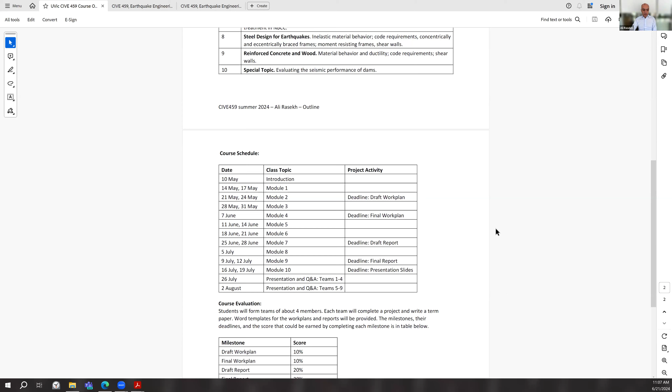As usual, we are at module number 6, and we are getting familiar with NBCC section 4.1.8. About good timing, like 21st, we are almost chasing our schedule.

Just a reminder that by end of next week, we'd like to receive the draft report where you should show about 60% progress, 60, 70, whatever, or more if you like. Then me and Behnam will review your work and provide comments to your work.

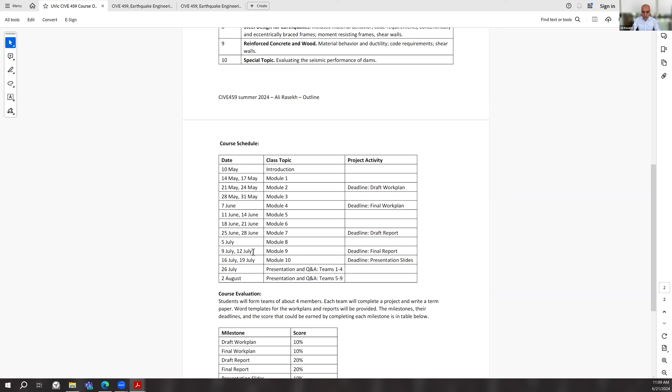Then you have 2 more weeks, or maybe you can continue your work, and in about 1 week, by about July 5th, after your reading break, you will receive some comments and then you'll have 1 more week to address those comments and finish. You'll be very happy because by about 12 July plus minus, you're 90%, 80% done with this course, or maybe 60%, 70% done, and then you can focus on your other tasks or projects or prepare for August vacation.

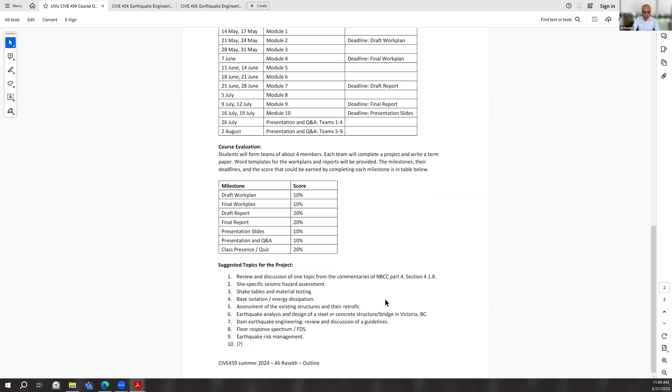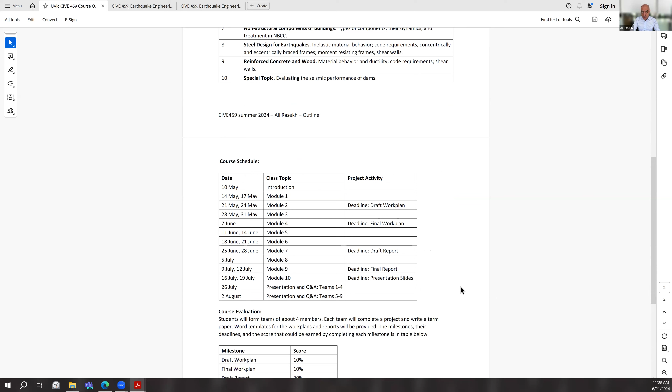So that's what we have. Generally, Behnam was very happy with the way you guys drafted your work plans, and I had a quick look - they look better than last year. I think you guys are progressing well so far. Just keep on doing what you are doing, and it would be great for all of us, finishing in time before August.

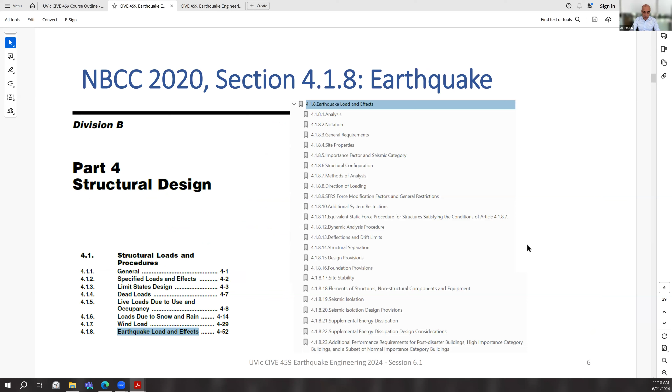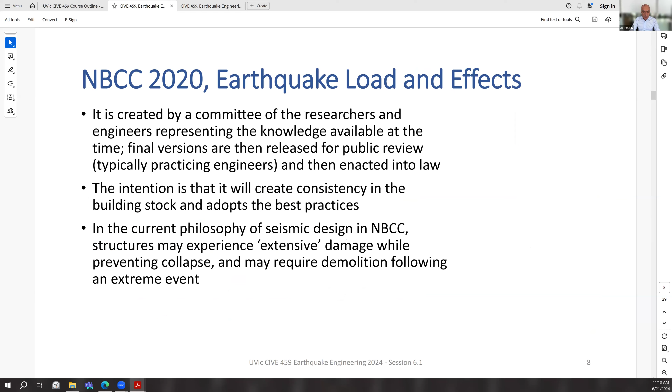Last week I was presenting NBCC 2020, and there's a link here, you can even Google search it, it's downloadable. It's a good decision made a few years ago that they make this free, available to everyone, because it's funded by taxpayers, so they shouldn't really charge for it. Development of the model code is probably some sort of taxpayer money, so it should be free. So you can download that.

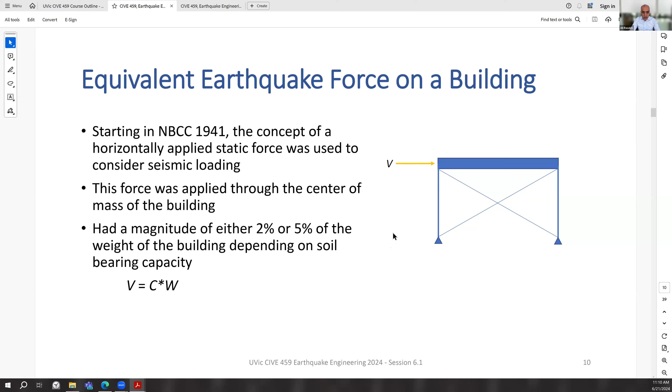We talked about the base shear, the concept of base shear, and why in structural engineering we call it base shear, because it's the total equivalent force that we apply to a structure to mimic earthquake response and earthquake forces and earthquake displacements. In a way it's easier, but sometimes it's better because it's easier to do and easier to verify and easier to validate and easier to gain confidence.

Sometimes easy procedures are more correct because a second person and a third person can quickly verify them and make sure that you are in the right direction. In the industry nowadays, like you guys, the younger guys, you like the more sophisticated computer modeling, but sometimes it's more difficult to gain confidence and make sure everything is correct and reasonable. These simpler solutions are easier to verify.

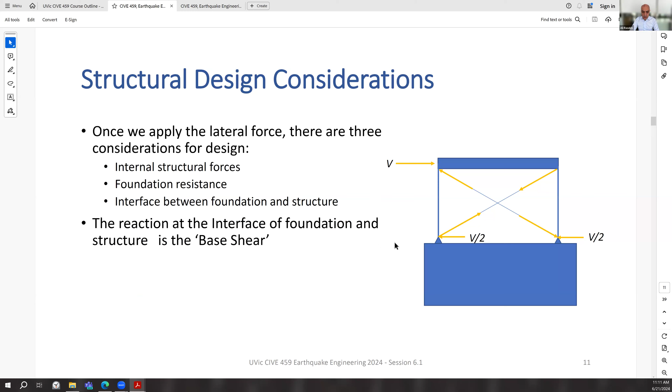So at least I generally recommend - I think we had a lesson about that as well, part of our discussion here - that at least we should go in multiple steps and start with the easier to understand and easier to verify solutions. Then if there is time and money, interest in client, then as a second step, go to more difficult solutions, which are more accurate in a way. There's a lot of interest in them nowadays, but at least do it step by step. Easiest solution based on this simple equation and code.

Then second step, I did RSA, and this is my model, and the results look different. Because of this reason and this reason, I have reduced the base shear by 10%, and I think that 10% is because I'm using a better solution. The reader has confidence, okay, there's a very easy to verify solution. Now the solution has improved by 10%, and these are the reasons for that.

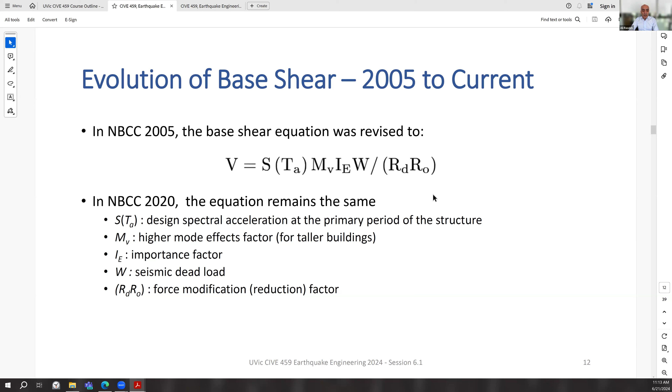Then there's more budget. Okay, I did a time history analysis, detailed time history analysis. I reduced the base shear by another 5%. And then the reader again says, yeah, makes sense because RSA is normally conservative. This company, this consulting, my colleague in the company has done a good job going to the next level of sophistication, and he has saved the contractor or the owner some money by reducing the base shear, which is very nice. So these are very valuable solutions, and they are based on lots of research and experience and experiment by engineers.

So you know that spectral acceleration multiplied by mass is the force that you expect to see. However, you are doing a single mode calculation versus higher mode calculation, and therefore you need an adjustment for that.

There is an importance factor because the more important structures will be less tolerant - say, if you want to think extreme, we are less tolerant towards cracks in a nuclear power plant versus a building. The building won't collapse because of a crack, but in a nuclear power plant, a crack may cause a lot of hazard to the people around it. Therefore, there are importance factors, just to build these ideas into your engineering judgment.

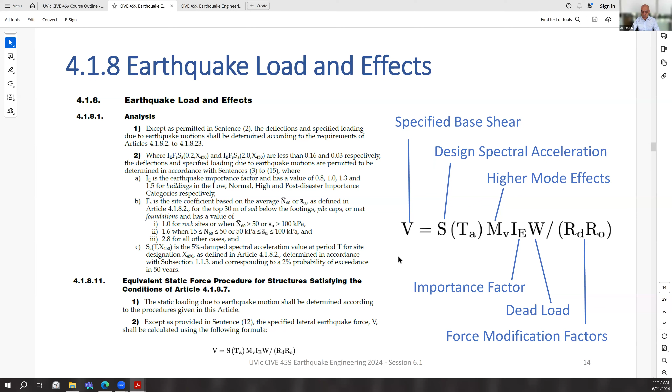That overstrength factor is also very important when we think about protecting the non-ductile members. That's another place we already slightly discussed, but we go over it one more time - overstrength is also important there to protect the non-ductile members that we are designing.

Again, the philosophy of ductility and why, after an elastic calculation of base shear, we should reduce the force for design: because the elastic easy solution is like this line and gives you this movement versus displacement. The displacement is agreeable because you can deform a structure as far as you want, but starting from some point, the structure will not really pick up load.

Therefore, you should build up in your judgment as a structural earthquake engineer that if I have completed an elastic calculation, I'm going too far in my forces - let's look at my code to see if there is any excuse to reduce that load. And there is an excuse: the code has already thought about it, and it gives you the reduction factor based on ductility.

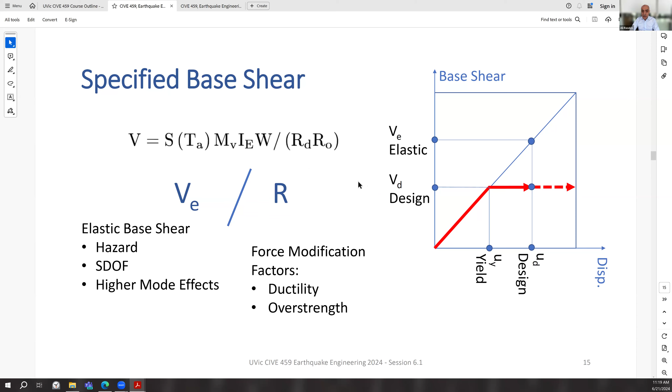Going to the next step: ductility related, we discussed that the structure's members are ductile, but then because of member ductility, the whole structure is ductile. This has been an exercise in envisioning the ductility of this whole system with many members and many connections. Pushover analysis was performed.

Pushover analysis helps us - that's a benefit of it - it helps ensure ductility. What I'm trying to say is that you can get into numbers, draw this plot and get exact numbers on how your structure will behave, deflection versus force. But even if you are not exactly chasing these numbers, when you see that your structure gradually gives in to force, you become more confident that you are really designing a ductile structure.

But if you see that this line is remaining straight, you should get worried that maybe you are not providing enough ductility in the system, and there's no energy absorption in the system. So building up, even just doing a quick exercise in building up this curve, will give you a quick sense of confidence that you are providing ductility.

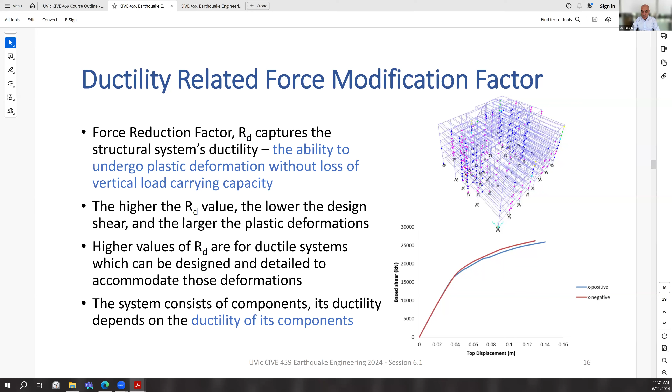Building up that fact within your judgment as a structural earthquake engineer. Here we try to basically build up into your engineering judgment that structures, for many reasons, we over-design them, and a lot of time we are happy with that. We prefer a structure to be too strong rather than too weak. There are some phenomenal parts of our analysis steps, quite a few of them, that help with building up more and more overstrength.

One is like factored strength, because we use a reduced strength in LRFD method, which is like load and resistance factor method. We increase the load and reduce the resistance, so the resistance that we use for design is less than the minimum strength. So the codes provide minimum strength, and we even reduce the minimum strength into a smaller number.

However, minimum strength is smaller than probable strength, because if somebody is doing tests on the steel, you will never do that, but we trust the numbers we receive from the vendor. But if we do a test and get the average of the tests, our strength would be at a higher level. However, the process in ASTM or CSA is not to recommend the average, but to recommend a measure of minimum, like 10 percentile or 5 percentile. So even the minimum is less than average. The minimum strength recommended by the code or the vendor is smaller than the average value, which we can call probable strength.

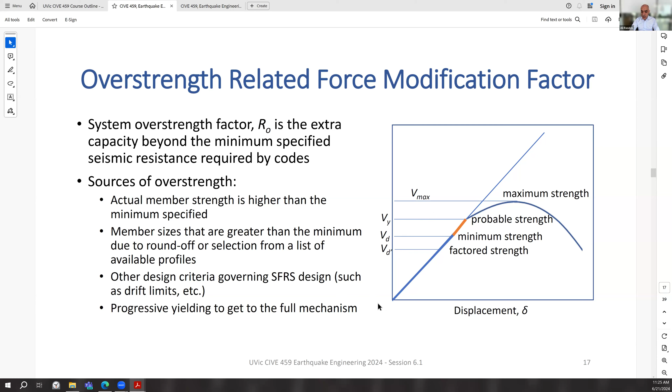But again, don't use your own calculation. The code tells you, based on experiment and test and experience, how much overstrength is built into any type of structure. Last week we opened the code. Hopefully you guys have already downloaded the code and can find your way through it, at least through the earthquake load section. They keep on moving things around a little bit, so sometimes you are familiar with one version and the next version is slightly different, but the concept almost remains the same.

The code gives you different reduction factors, which they call modification factors, but they are really there to reduce the demand — both the reduction factor resulted from ductility and the reduction factor resulted from overstrength. The code knows, based on experiment, experience, and engineering judgment, how much reduction applies within each structure.

And there are recommendations on how to make each structure more ductile. I think it's clearly said in the new steel code — we opened this part of the table, which is about steel. The steel code clearly tells you how to detail the steel structure so that it's completely ductile or moderately ductile. And if you don't do any conventional detailing, it remains with limited ductility.

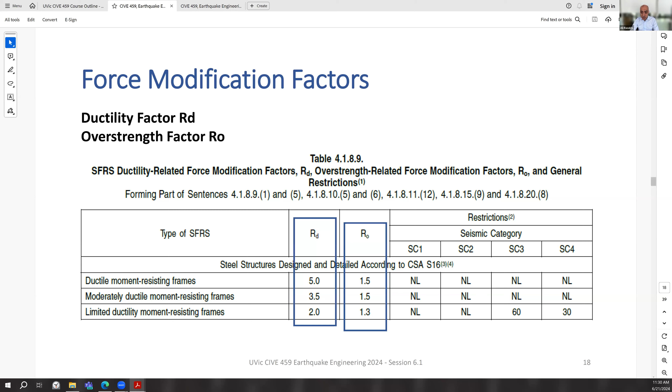And the concept of capacity design is super important. A good earthquake engineer should somehow, at least, try to understand this. Every time I understand it better, I think it's because I teach it or when I discuss it. But it's a very, very important concept in earthquake engineering. If you understand it well, you are a great earthquake engineer.

And the idea, as we said last week, was that we provide ductility in our system through certain parts of the system. The system is a structure for us, we are structural engineers. It's not that every member of the structure needs to be ductile. However, certain members we want them to be ductile.

There's a concept of load path that any structural engineer, even non-earthquake structural engineer, should really be fluent with - that we always talk about load path, how loads are carried from a location in the structure to the foundation. That's the purpose of building structures, is to carry the loads into the foundation. So the right-hand side is your foundation, left-hand side is where the load is originated. In our case, earthquake engineering, the loads come from masses and weights in every floor of the building.

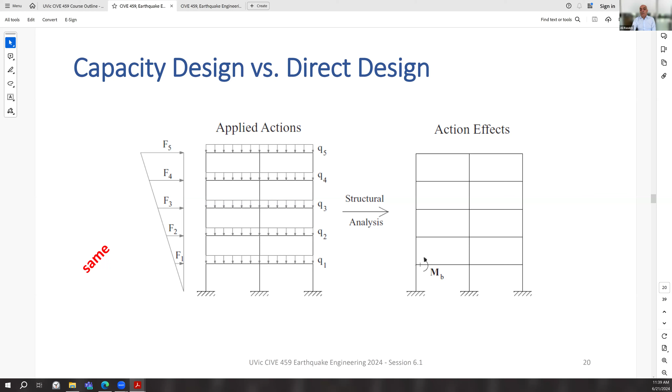So this is based on good engineering judgment. In most cases, we recommend for a building structure to have ductility within the beams, and therefore the column is part of the brittle link. Most of the time, the connections are also considered brittle. It's difficult to make connections ductile enough, although we always advocate for more ductility in connections, but connections are limited, so they cannot really elongate in any direction.

So that's again general judgment that connections are also on the brittle side. Now we come here. If your load is wind, say everything in the scenario remains the same, but this lateral load is caused by wind.

We go more towards the direct design philosophy on the left-hand side, which means we simply read the forces from, say, SAP2000, which tells us the reactions - the end reactions. The end reactions in the beam help with design of the beam. The end reactions in the column help with design of the columns. And the corresponding connections are also designed accordingly.

However, when we are more in the design for earthquake, especially non-conventional, more ductile design, where we can take advantage of the ductility reduction ratio - the reduction caused by ductility - we should think in terms of capacity design. Then the steps are something like this. We will reiterate this a few times.

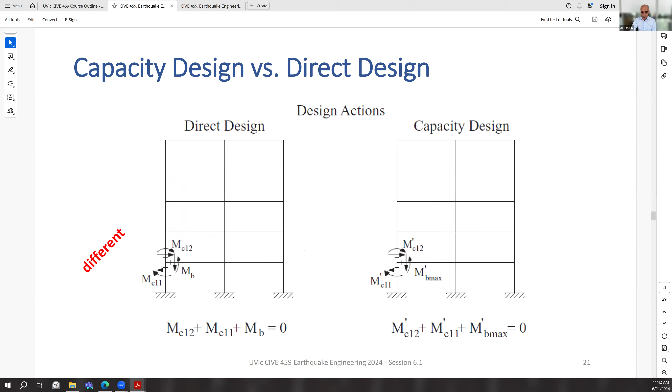So that's a concept. This concept, you can always have it in your mind. And then when we come into structural engineering, more focus on structural engineering, we end up with this scenario that the ductile member capacity is used in the design of the non-ductile members. So let's see how the ductile yielding mechanisms are in different scenarios that we encounter.

Left-hand side is a concrete shear wall or bridge pier. We said that we don't like plastic hinges in vertical members, but in this case, as it's inevitable, a plastic hinge might happen at the base. We try to really avoid higher elevation than the base, but at the base, if everything is yielding, the base is also under a lot of stress, and maybe there is a plastic hinge at the base in buildings. In bridges, even the philosophy is different, so we don't get into that.

In bridges sometimes it's reversed, like plastic piers and a non-plastic superstructure. But yeah, that's the mechanism of the development of a plastic hinge in a pier or in a shear wall, which is almost similar. The coupling beams deform inelastically in shear and flexure for this building. We said that we like to see that. We like to see less plastic hinging in columns, but at the base it sometimes happens. So that's a building design philosophy, but just sharing what plastic ductility means in this type of structures.

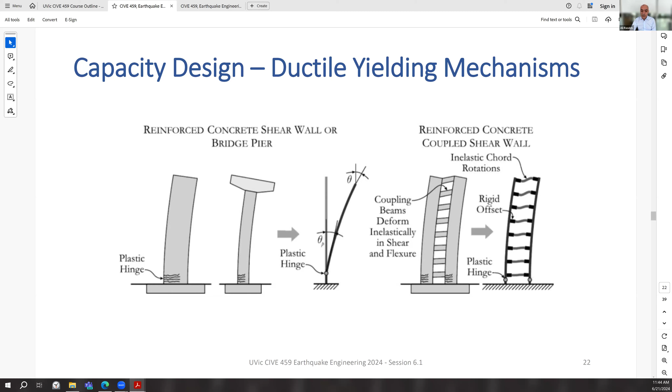In a reinforced concrete two-column bridge bent, what does it mean? The plastic hinges might happen at the bottom of the piers of the bent and at the top of the piers of the bent. So schematically, two plastic hinges on two sides. For a plastic hinge, you can imagine too much rotation, the concrete is giving in to deformation and it still is yielding, etc. So that's what it means in the concrete members.

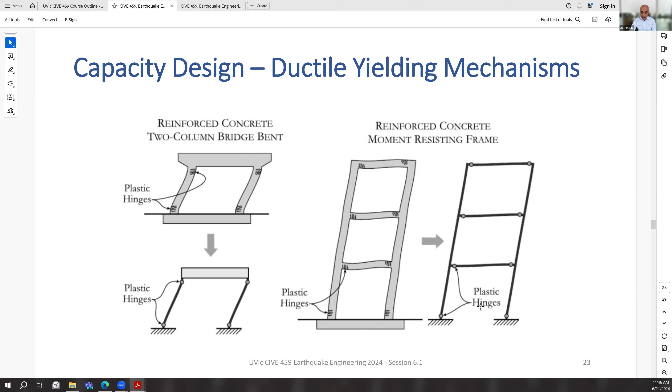The side on the right side, we have a building, like a structural building. And yeah, so we advocate plastic hinges in the beams. We don't mind at the base, but we really try to prohibit having too many plastic hinges on the vertical load carrying side. Again, what it means physically in a reinforced concrete moment resisting frame is that lots of cracks are happening there, and steel is yielding. And on the opposite side, the concrete is under a lot of compressive stress. Schematically, we say plastic hinges are happening.

We next see what we mean by ductile yielding in steel concentrically braced frames. We will reintroduce this one more time when we are talking about the steel. Concentrically braced means that the two braces are meeting each other at one point, versus eccentric bracing, which means the two braces are not really meeting each other at one point, and there is a shear region in between. So the ductility mechanism between the two is slightly different, or completely different.

In the concentrically braced frames, we are mostly depending on the braces themselves to provide ductility. As you see here, some ductility is provided, which means energy absorption is provided by this brace extending too much and yielding. Some more ductility is provided by this other member buckling out, compressed, buckled out, and when they are buckling out, basically some plastic hinges happen. They see a lot of moment, larger moment than they are designed for, and therefore the process of buckling and creating those plastic hinges helps with energy absorption. So it's beneficial in terms of energy absorption.

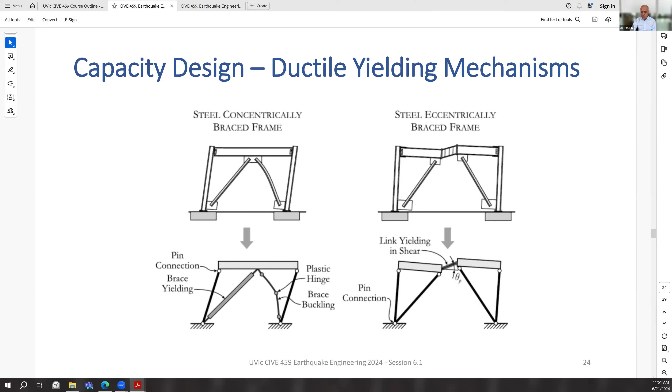One more time, reviewing the capacity design procedure. On the left-hand side is a structure, and you might be designing this structure with a roof diaphragm, which would be the main source of your force. Maybe we can imagine it on the left-hand side of the chain here. And then there is a load path for carrying this force to the foundation, going through the bracing system.

Bracing system has created ductility in the system. Like we want to enforce ductility as part of our design. It doesn't naturally do that; it should be designed for that. We want to design this bracing system both to resist the lateral force, prevent collapse in earthquake, and also we want them to act as ductile members.

That X bracing, which is concentric bracing. So again, we imagine what we want in terms of this chain, which is a very good schematic tool. The load is on top. The load path goes through the roof diaphragm. So it's important that the roof diaphragm be designed properly so that the load is carried into the bracing member, the lateral load. Vertical load path is different.

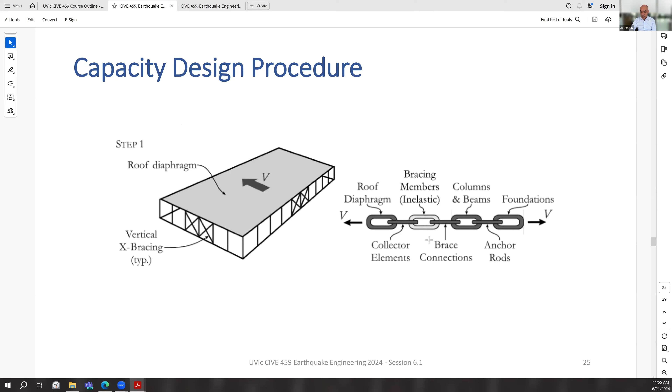Collector elements, which take the load from roof to the beams and also to the bracing, then the bracing connection, and then the very base anchor rods—these are other non-ductile members. In terms of capacity design, we want to protect the non-ductile members from sudden fracture or collapse during earthquake. We want only the bracing members to sustain major deformation, because we designed them for that purpose.

So step one is to understand the load path. Step two is focusing on one of the bracing members and its corresponding load. Bracing members are selected to satisfy, number one, strength requirements under applicable building code load combination. Number two, detailing requirements to achieve ductile inelastic cyclic response.

So there's a load combination here, based on good judgment. The division of work in this case is simple: all the verticals go to the column, all the laterals go to the bracing. So although there is a combination of load really applied, we know that lateral will be taken by bracing and vertical by the column.

But in general that might not be the case. Maybe the brace is also ductile, and the ductile member is also taking part of the vertical load as well. And then there's a detailing requirement. So this member, at the end of step number one, the bracing is fully designed for its force.

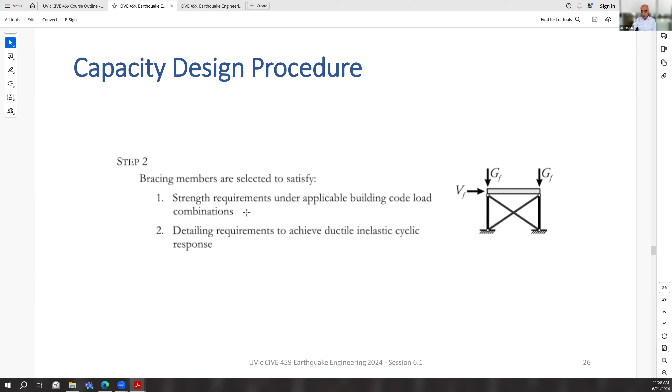Summary: we are trying to estimate the load caused by yielding of the real member, which might be stronger than the minimum requirement. Maybe the designer decides to put a member there while completing step number 1, for many reasons like availability, economy, or pricing. So you end up putting in a member which is twice as strong as what step number 1 really requires. You have a real overstrength issue here.

In part 2 of step 3, we want to estimate the real capacity of that member based on how members buckle in compression, and how much force they show in buckling of that real, twice-as-strong member, and how much tension it shows when it yields. The code helps us find these values.

Now we use the real strength of the member that is actually designed there to estimate every other force. So basically, we apply the capacities to the bracing, and now we read the forces that result from that in connections, most importantly connections, and maybe in other members as well. That's where step 3 is.

Other seismic force resisting system components are designed to satisfy strength requirements corresponding to brace-imposed loads plus gravity load. The connections on all four corners of the bracing are the important ones, which should be designed for the capacity of the braces. The anchors that carry the load to the foundation must also correspond to the capacity of the bracing, not to the demand in the bracing.

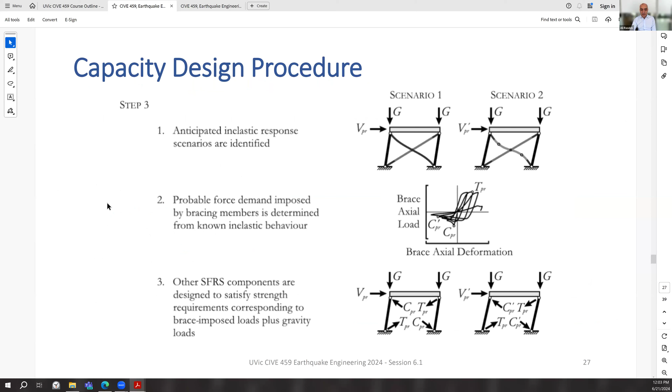Now let's get back to the design spectral accelerations. Just switching the subject to another important subject. Getting out of this, as I said, capacity design is very important. You will be very famous if you fully understand capacity design. I'm not saying it's easy, but it's a nice and niche topic, and people who fully understand it are at the higher end of consulting for earthquake engineering.

So just changing subject, let's go back to our SA, spectral accelerations, and the factors important in that sense. That was like we were talking about ductility and reduction factors, etc. Now let's change subject to SA and the factors affecting SA.

We are normally interested in the top 100 feet layer of the soil we're working with, or top 30 meters. We want the geotechnical engineer or site studies to give us an approximation of the top 30 meters or top 100 feet, if I'm reading this correctly. There is a lot of variation in the top 40 feet, and we think that the 60 feet underneath it remains the same bedrock. This picture gives us a picture of the site we are interested in.

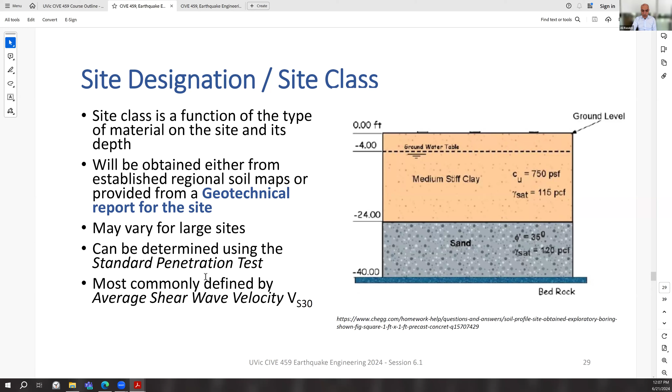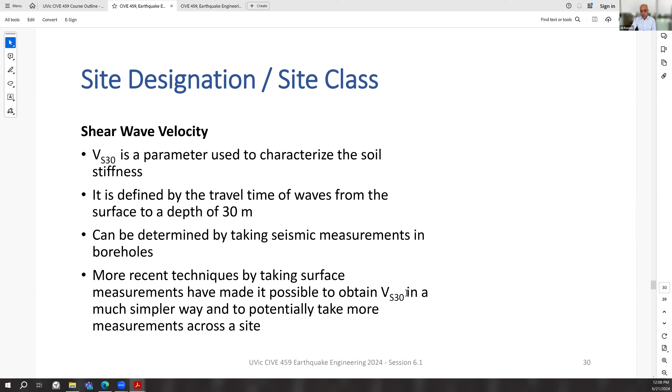More recent techniques using surface measurements have made it possible to obtain VS30 in a much simpler way and potentially take more measurements across the site. Other tests like boreholes or SPT could be expensive, but superficial vibration tests give us a lot of good information at lower cost. We get better information, we make better decisions.

Then there are tables in the code that tell you what site designation corresponds to what ground profile characteristics. A lot of times, at least in my field of work, we think and talk in terms of shear wave velocity, but geotechs will think in terms of SPT results, plasticity index, moisture content, and other factors. We think mostly in terms of shear wave velocity, and these correspond and correlate to each other.

We like the shear wave velocity to be higher. That's a benefit. Higher shear wave velocity means the material is stiffer, and you are more on the rock side.

The site designation, in terms of NBC, is something new I think compared with 2015. Previously we had site class, now somehow they've split it into two steps: site designation and site class. But in most codes in the world, site class is definitely important. For some reason, they decided to do it in two steps, talking about site designation first and then going to site class.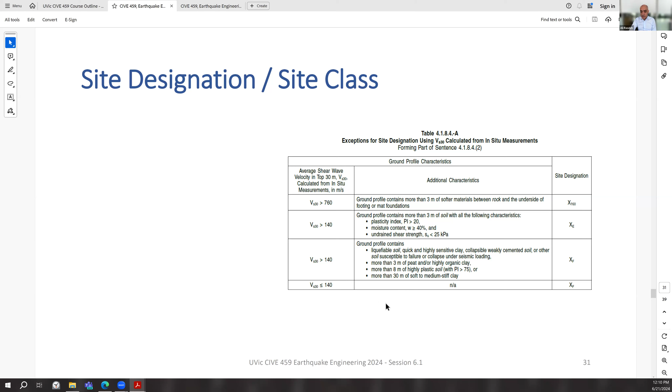For generations, engineers are familiar with classes A, B, C, D, E, F, and you try to correlate it with designation. Basically, site class A is hard rock, very strong and competent rock. As you move gradually down from A to F, you end up with very soft soil, which is not reliable. When you get to F, it normally means you need serious geotechnical investigation and serious involvement of a geotechnical engineer.

So going from hard rock, to dense soil, to soft soil, stiff soil and soft soil, and then bad or poor soil. In terms of the speed of shear wave in the top 30 meters, that's greater than 1500, down to 760, and down to 360.

That's more about measurement, dealing with speed of shear wave versus site class. In terms of SPT, that's more geotechnical nomenclature, but you may receive reports in terms of SPT, and then you should decide about your site class. And also in terms of average undrained shear strength, it's not really a geotechnical issue for us, but you may receive these values and correlate them to the site class.

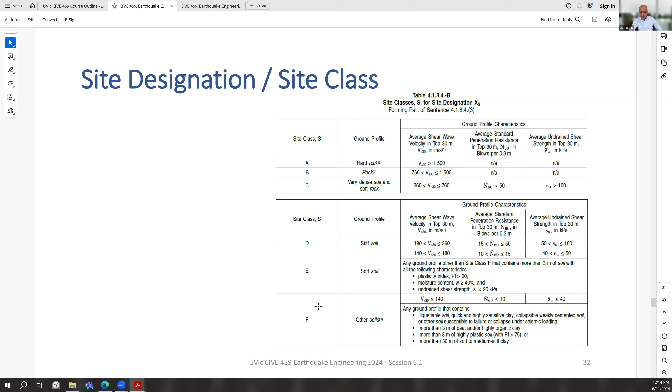Other than that, if it's not under category F, then we look at category E: high plasticity index, or moisture content which is high, or shear strength which is low. Those are indications of site class E, which is concerning, but not as bad as F. F is just bad for us - be very concerned, red flag it, and avoid it.

Now, design spectrum - we discussed it previously in the context of spectral analysis. But here we want the design spectrum, meaning what the code recommends for design. In the new 2020 formulation, a lot of times in the books or in my presentation we only talk about SA of T, related to the site class, but the new nomenclature calls it SAT with designation. So emphasizing that designation is important - don't use SAT naively, pay attention to the designation.

It's a 5% damped spectral acceleration expressed as a ratio to gravitational acceleration. For people who took dynamics, you know acceleration multiplied by mass is force, but because this acceleration is calibrated with respect to gravitational acceleration, it's divided by g. Therefore we can more easily multiply by weight - that's a comment for people familiar with general dynamics, why it appears we're multiplying acceleration by weight, because it's already divided by g.

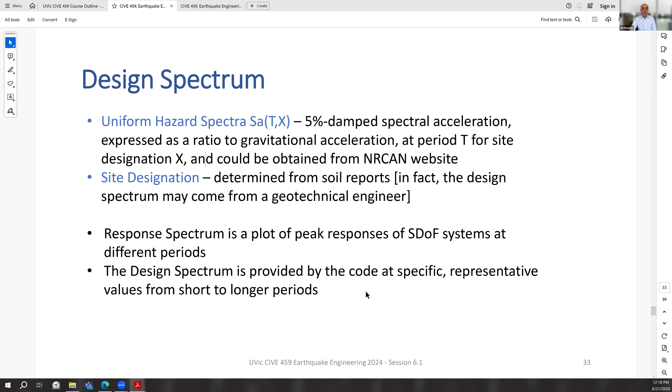Response spectrum is a plot of peak responses, we said that a few times. The design spectrum is provided by the code at specific representative values, and we interpolate between them from short to long periods. We will go through using the latest website next time, next Tuesday.